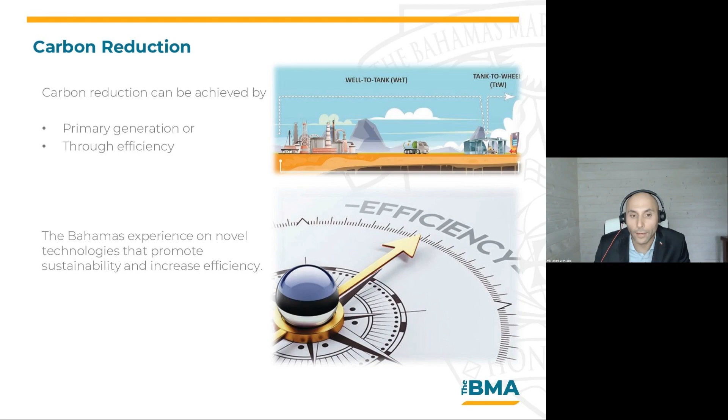So the first one is the waste heat recovery system. This unit is very simple, using Rankine cycle systems to generate electric power, using hot cooling water from the ship's main engine to generate power. It's another additional element you add as part of your energy to produce power, and these pictures represent what it looks like on a ship installation.

As you can see, it's generally in the machinery space. It can be on banks, it can be many other ways. The system is very simple.

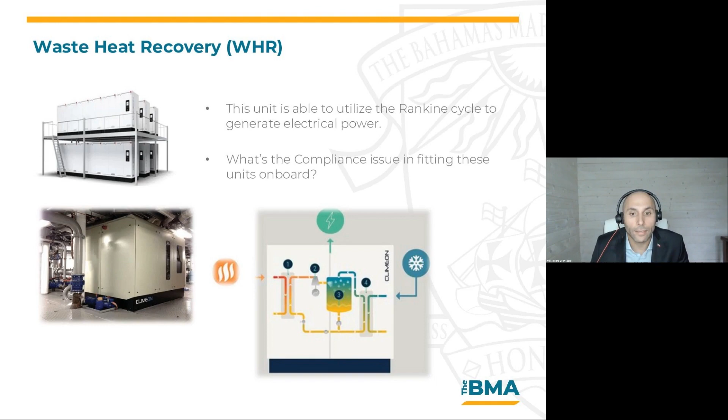However, there is a compliance issue here. The system works with acetone, and as we know, acetone is toxic, so other work needs to be done. The flammability is quite high, with a low flash point in the machinery space below 60-degree temperature - ventilation issues, training, what fire suppression system we have, fire protection system, and pollution risk. We want to make sure that if we go ahead and install this system, it's not going to create a threat to the crew or an additional fire risk that we don't want.

So there are ways we can always try to overcome these issues, and this is obviously through thorough analysis. We do risk preparations, we try to identify all the risks that there are, and minimize the risk to the optimal maximum.

Talking about systems, just to give you a bit of an expanded view, what this exercise requires is hazard identification of the system, risk-based analysis, FMEA, hazard and operability studies, and the list goes on.

Once this system is finally fitted on board, installed, certified, and qualified, does that mean we can now roll it out and fit it to other ships? The answer is simply no. The reason is because each ship has a different layout, different risk, different systems on board, and perhaps something that might work really well on passenger ships or Ro-Pax may not work so well on an offshore unit, for instance.

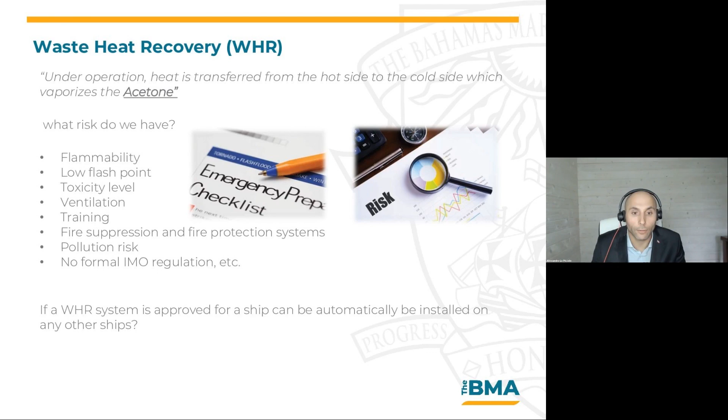So going ahead on the agenda, we also have these MAGS thermal waste systems. Now, the initial overview that you might have is that it's indicated to be an incinerator. At the current stage, on our ships, they are certified as an incinerator.

However, this system offers a lot more than just incinerating. First of all, the system is capable, thanks to this technology, of converting all combustible materials such as plastic, paper, and textile into energy. Also, the way it works, the heat generated from the combustion chamber recirculates to gasifier chambers to create a self-sustaining process. Now, the OEM in particular claims to have a huge fuel saving.

And that's how we start talking about efficiency, carbon footprint, and so forth. They claim that they use between 0 and 20 liters a day of MGO, and can dispose of up to 1 ton a day.

Why are we also talking about this one? Because the way the system is designed has exceptional clean emissions. Obviously it's got scrubber systems and everything else, but the clean emissions are exceptionally low, and that allows potential rooms to have the system operating in port.

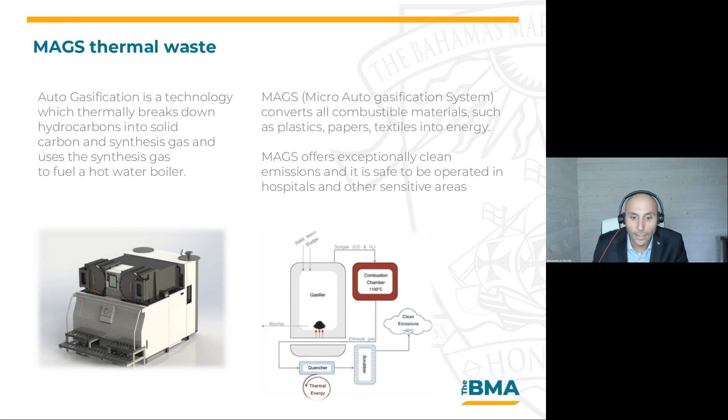Now, as of today, the IMO structure is not there yet. There is work undertaken at the moment at the PPR7/INF.12 paper. This paper essentially identifies 2 different levels, level 1 and level 2. Level 1 is basically similar to the incinerator system, but with continuous monitoring, which at the moment normal incinerators do not have. And level 2 is similar to the EU regulations for landfill thermal waste systems.

Looking at the specs presented to us, the actual system is well below the requirements, which is already quite stringent from level 2. So essentially, what that says is that the system operates at a better and more optimal level than the actual systems that are potentially fitted on shore at the landfill.

So as the Bahamas, we are working closely with the owners and operators to establish a framework in order to certify these units as gasifiers.

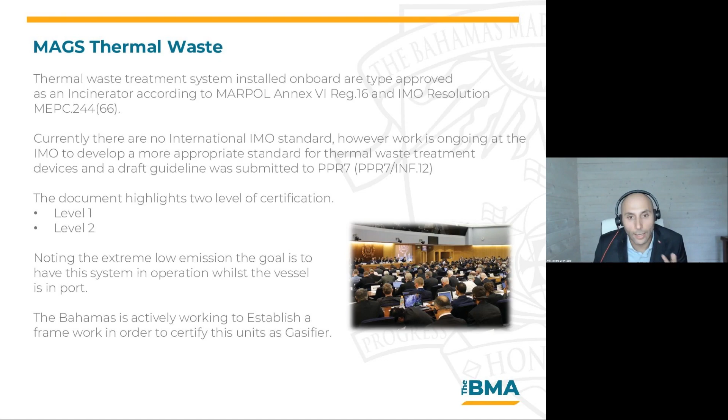The important thing to talk about is we've been talking about all this good energy saving and carbon footprint, but there's a little more to expand on - what might happen at the landfill. So when we talk about waste storage on board ships, and we're talking about these large passenger ships, now we have about 8,000 people on board, they're quite large, and there is a lot of waste to dispose.

When the waste storage is on board, it's already presenting a risk in itself. When landing the waste ashore, obviously there will be trucks involved, transport, incineration on shore, not to mention the risk of fire on those landfills, which might impact more on the environment - I don't know, hurricane rains that may blow the plastic back into the ocean again.

Obviously, for cruise ships, this is becoming an issue—the time they have to spend offloading garbage and the handling of it itself. So they obviously choose a destination port which they can handle better. For a port itself, if they don't have such a difficulty, they can have a small reception facility, so that could work.

But when we're talking not just about large passenger ships, let's think about those expedition vessels. Again, those expedition vessels would be somewhere remote and have a restricted capability, so they need to retain on board as much as they can.

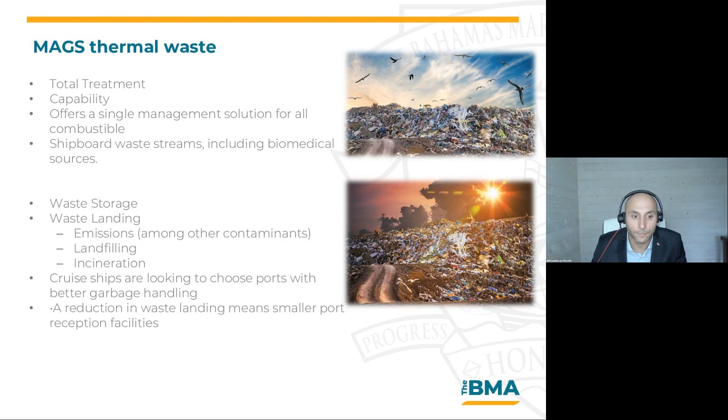So moving forward in the agenda, and again, I'm trying to rush because we only have 20 minutes, and I want to make sure we nail all the principles we're trying to talk about today. Obviously, fuel cells are largely discussed.

So what's the advantage of the fuel cell? The use of a fuel cell does not only result in reduced air emissions and improved fuel efficiency, but also increases the availability of options to ship owners for complying with increasingly stringent environmental regulations. So can fuel cells be considered a novel technology? Actually, no, but it is to some extent novel in ship applications because on ships it's becoming a new thing. But there's been large use of this technology back in the days.

What's the risk and what are the new challenges? Again, we're going to be talking about that.

This is just to show the challenge we have from an administration perspective. The IMO papers are still in current draft, so the CCC 7 is a good paper to start, but it's in draft status, which means it can change. It will be presented to the next MSC 105 session in April 2022. If it gets rejected, it needs to go back to the working group and be drafted again. It shouldn't be the case, and I don't foresee it will change too much if that happens. However, it is an option on the table.

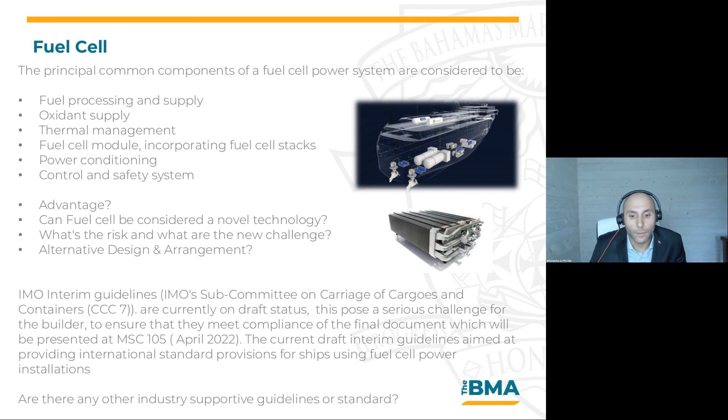Going forward, what's the scope of the risk analysis that we have on fuel cells? This is basically to identify all possible failures that have been correctly addressed, evaluate the consequences for each failure of the systems, identify that the failure detection methods are in place, and most importantly identify that corrective measures are in place at all times—so if something fails, what happens next, and so forth.

They spend lots of time doing this exercise. So going back again for the fuel cell, to complete what we've seen today on our passenger ships: there are two trends at the moment being used as fuel cell technology. One is called proton exchange membrane, also known as PEM, and the other is solid oxide fuel cells, SOFC.

The two trends as well for fuels are LNG and methanol at the moment. There is an appetite in the room for hydrogen and ammonia, but at the moment this hasn't been developed, or at least it's not on our table to address right now. But it will be for sure something we might see in the future to come.

With regard to fuel cells and LNG and methanol, again there are new combustion experiences. We go back again on the same principle—bunkering process, where it's stored, and so forth. The list goes on. But strangely enough, sometimes you see LNG ships which choose methanol for the fuel cells, which you'd imagine they'd use LNG instead since they already have LNG on board. But again, it's another level of redundancy that they might want to create.

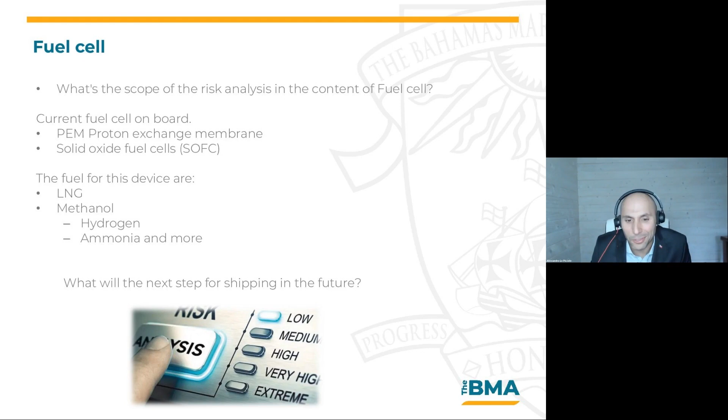So the MEPC.1/Circ.815 addressed the guidelines for innovative energy efficiency systems, and addressed wind propulsion and the generation of electricity through waste heat recovery systems. So they got their own category, and this is basically to allow work more on the EEDI, which is largely discussed.